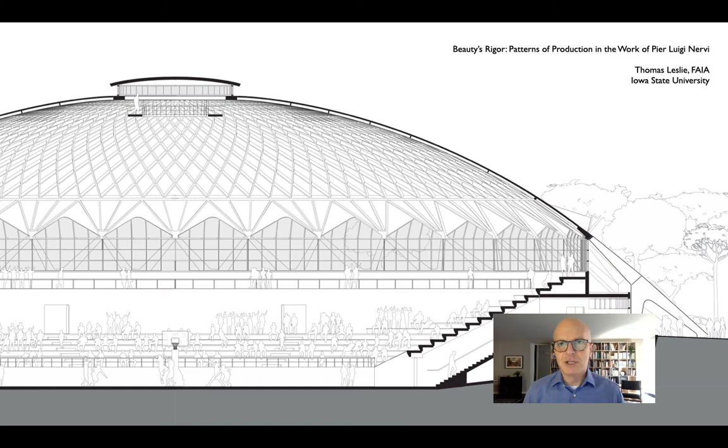So to begin with, Pier Luigi Nervi was an Italian engineer, born in 1891 in the town of Sondrio. His father was a postmaster, which was an upper middle class job at the time. And so Nervi moved around quite a bit, but ended up going to school in a Piarist school. Piarism is a particular sect of Catholicism that believes both in a very rigorous approach to learning, but also in a very particular type of social justice. So Nervi went to school not only with kids of his own stature, but from all across the socioeconomic spectrum in Italy.

And he blossomed into someone who I think is generally acknowledged as one of the great engineers, one of the great designers of the 20th century, and how he got there and how he came to do these building structures that are both incredibly impressive, long spans, some of the largest reinforced concrete domes ever built at the time, still some of the largest reinforced concrete domes in existence today, combined with this incredibly delicate, graceful sensibility, how those large spans are rendered in these very finely scaled patterns and rhythms, structural rhythms, and as I'll show, constructional rhythms. This, I think, is what made Nervi unique, that his spans aren't just the biggest spans in the world, they're also some of the most beautiful.

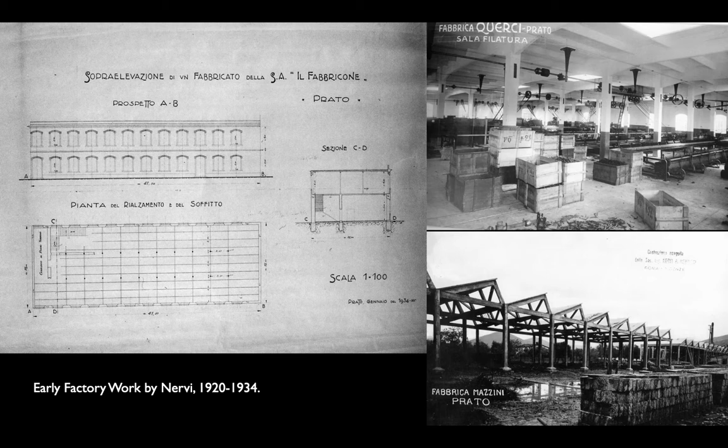So instead, Italy had to either make do with what it had, which was not very much, or find another material. Now, for Mussolini, that was brick and stone, like the old Roman architecture. Nervi, though, disagreed with this.

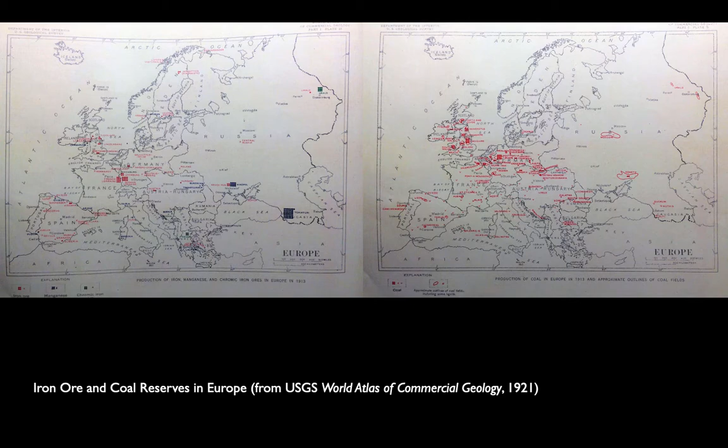And he actually wrote a very brave editorial in 1938 called For Autarky, for this economic autonomy, in which he said that, look, if you build the way the ancient Romans did, you are going to build buildings that are so heavy, that require so much brick, so much stone, that by the time you're done, you could have done the job much cheaper if you had used concrete, if you had taken just what little steel Italy can afford to make, used it as reinforcement, and built out of this new modern material that we have all the ingredients for. It's not a traditional Italian material, not a traditional Roman material, but it's actually much cheaper and therefore much more self-sufficient to build in this new modern material, right, concrete.

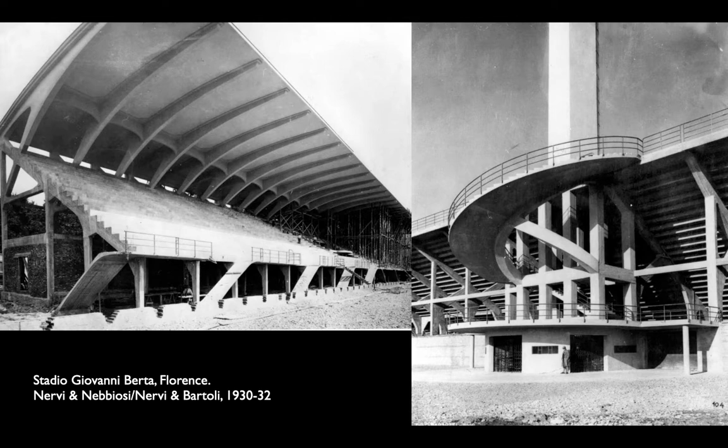Now, Nervi opens up his first contracting practice with a cousin of his, Nebbiosi, and they get the commission for the municipal stadium for Florence for a new combined football team that today is called Fiorentina. And this was a kind of fascist idea. Florence had 3 or 4 not so good football teams, and the owner of one of them realized that if they could combine their forces, like good fascists, they could have a much stronger football team. And he hires Nervi and Nebbiosi to design and build this grandstand for the new team.

You see what they built in 1930 on the left. This has this very famous cantilevered grandstand roof. And on the right, you see the second phase of the project, done in 1931-1932. Nervi takes up with a new contracting partner, Bartoli, in 1931. And Bartoli is a little bit more adventurous. Nervi, being a slightly restless engineer, is pleased with the graceful form of the cantilever, but he also wants to explore new forms that are peculiar to concrete.

And on the right, you see probably the best known element of this stadium in Florence, these helical stairs. And if you think about it, they allow the stands to fill much more efficiently. On the left, you can see that the fans are all coming in at the front, and of course everyone is just going to take the front row, and people are going to have to filter through that to get back. Nervi here is solving a circulation problem. People are coming in at the back, they can drop down to the front and fill the stadium from the bottom up. And to do that, he designs this double helix of a stair, too complex to actually calculate how that stair is going to stand up.

Now, these commissions come about because the Italian military, just like the construction industry, is facing this tremendous steel shortage. Steel is an even more important material for weaponry and for transportation, and they, having no access to it, are first of all concerned about building hangars for the Italian Air Force, which are mostly these very fragile biplanes at this point. Without steel, there's no good way to build these long spans to shelter their planes, to keep them out of the rain and the wind.

Nervi comes up with a kind of structural hack where he takes 3 or 4 different ideas and knits them together. In this first round of hangars in 1937 outside of Orvieto, there were a pair of these, and you can see that they are a kind of arched vault, so a relatively efficient shape to begin with. That vault is arched high enough that most of the roof is going to be in compression no matter what. And then he takes that vault and he turns it into what's called a lamella structure. So these diamond-shaped patterns on the underside, these intersecting ribs.

And you can think about these ribs in a couple of ways. Either they are stiffening that thin shell vault above, or the way I sort of think of it is they're like the coffering in the Pantheon.

They're kind of tricking the roof into thinking that it's 3 or 4 feet deep, when in fact you're able to scoop out most of the dead weight of the roof and leave this network of ribs in place that are going to channel most of the loads. So a couple of clever structural ideas there.

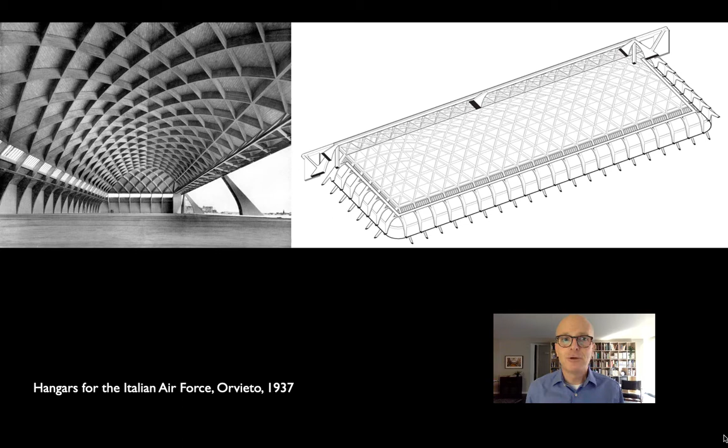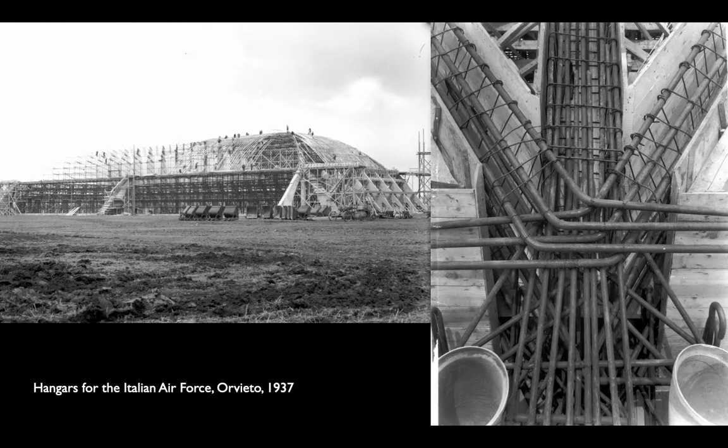It's a very clever scheme, right? Combining a couple of structural ideas into one unified form, and it has this very pleasing pattern to it, right? The structure breaks down in a way that we recognize as slightly more humanly scaled. Now, the hangars are a huge success. They come in on budget. They do a good job of protecting the planes.

But Nervi is a little bit uneasy about how they actually are built and how they perform. And the reason is twofold. One is, as you can see on the right, even though he's managed to scoop out most of the dead weight from this vault, the roof is heavy enough that as it comes down to these buttresses, as all of those loads collect, this is using an awful lot of that very precious and very hard to come by steel.

It's using it for reinforcing, which is a little bit easier to manufacture than large steel structural elements. But as you can see, when this gets down to the base, it's pretty much a steel structure with a thin coating of concrete on it. The other thing that Nervi is troubled by is the fact that because it's poured in place, it has to be monolithic. It has to be poured all at once.

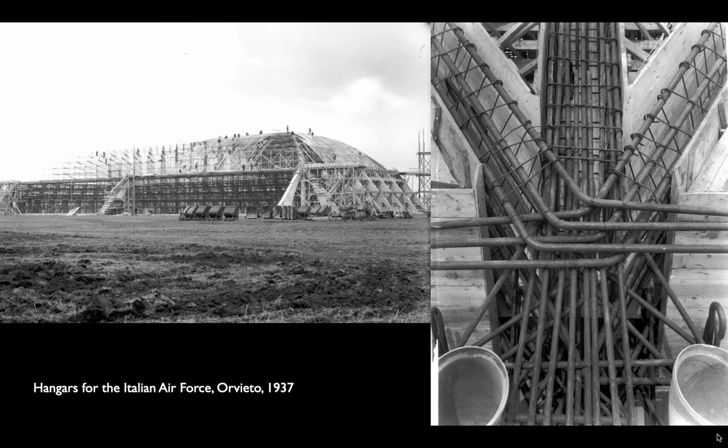And Nervi essentially has to form the entire structure out of wood before he can pour it in concrete. He refers to this as building the building twice, wasting all of that expensive timber formwork. Italy has lots of timber, but it doesn't have an enormous amount. It's been a heavily deforested peninsula since Roman times, and timber is available but not free. And Nervi realizes that there are a couple of ways that these structures could probably be improved.

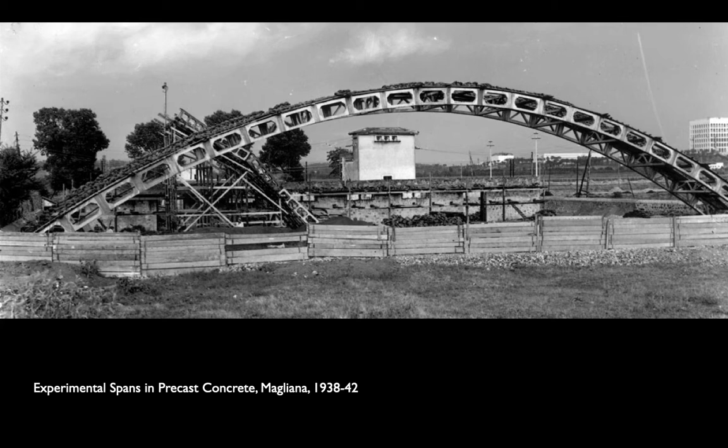He goes back to his yard in Magliana and he starts looking at ways to eliminate dead weight in the roof, and also to eliminate the timber formwork that's excessively costly. And he begins these experiments in precasting, where he's basically fabricating elements on the ground out of concrete. And because he's prefabricating them, he can use much more complicated formwork, right? He's not building formwork up in the sky. He can cast these on the ground.

So as you can see, this segment here has one arch that's all trussed up. You see that in the background. And another that's more like a Vierendeel, right? Thick moment connections at the edge of each arch. You can also see in the background another experiment, in which he realized that you could cast larger truss elements that would take the place of those ribs, cast them on the ground, lift them into place, and in this sketch in Nervi's archives, you can see in the upper left,

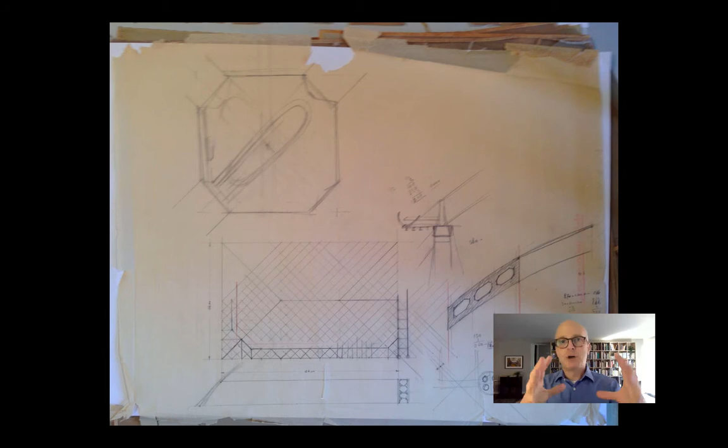linking them together, gluing them together basically by taking a wire reinforcement, not thick rebar, but thinner wire, looping them around and pouring this octagon shape of a poured-in-place concrete plug. So precasting the 4 elements coming into it on the diagonal, building a small octagonal box that these all frame into, pouring the concrete to glue the reinforcing together, and basically creating a monolithic, very efficient concrete structure out of hundreds and hundreds of little pieces.

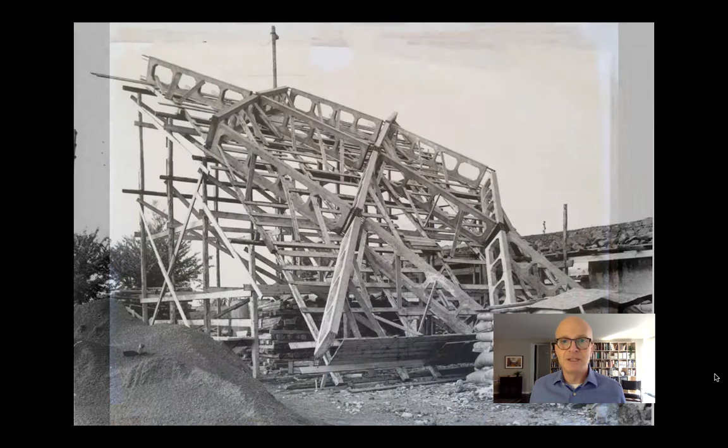And this is what that looks like. This is a close-up of that experimental rig. And you can see that instead of formwork, all he has to build to support this is scaffolding. You can use scantling timber for that. And you can see between these truss elements the reinforcing wire sticking out, ready to receive the octagonal plugs that will hold it all together. And this principle becomes something that sticks with Nervi his whole career.

He realizes that prefabrication means that he can break the scale of the construction job down to small enough elements that, first of all, a small crew of workmen can put them together on the ground. And second of all, a relatively small piece of equipment can lift those pieces into place.

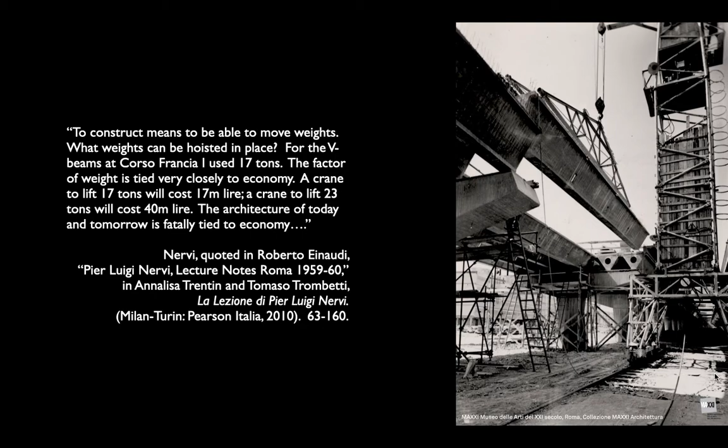Nervi Bartoli is essentially an artisanal contracting firm. They don't own their own heavy equipment, they have to rent it. And therefore, if they can rent a smaller piece of equipment to lift smaller elements of construction, they can save money, right? And as you can see here, they can save, in some cases, more than 50% of the rental costs.

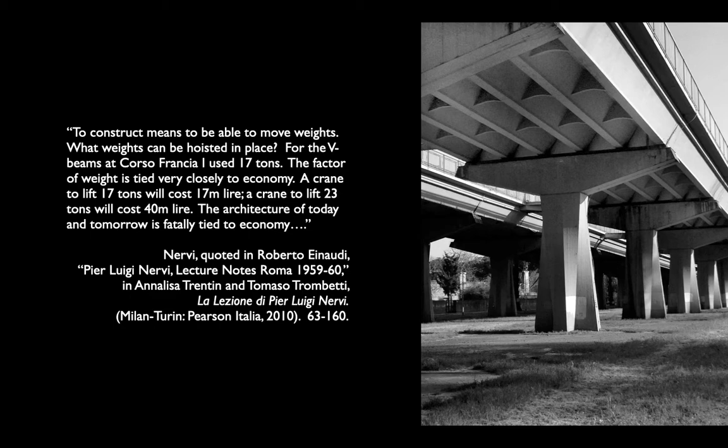And here you can see that this sticks with him. This is the prefabricated, precast Corso Francia, which is the viaduct that runs behind the Palazzetto and the Rome Olympic sites up north of town.

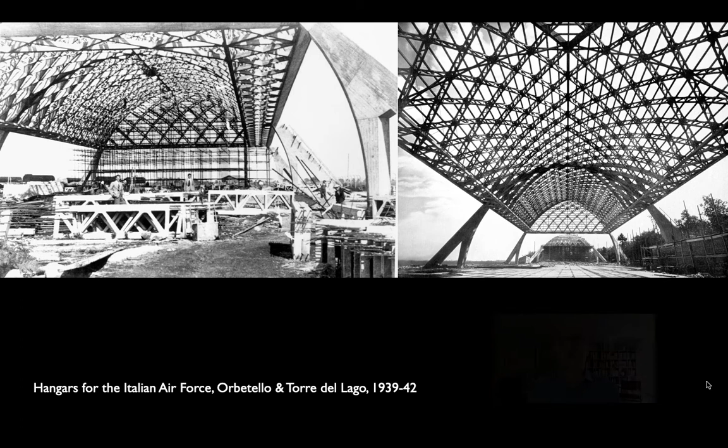And I think that what this represents is Nervi realizing that the engineering and the construction and the fabrication have all gotten so honed, so distilled, so boiled down to their bare essence, that it's almost inevitable that what comes out of that is something beautiful, right? And I think of this as him almost backing into architecture from engineering, right? Creating engineering that's so rigorous, so clearly conceived that it actually reads as something visually quite beautiful. The span combined with the human scale pattern gives us something that goes beyond simple engineering.

Very few perspectives, a lot of plans to show where things lay out, but most of it is about the performance and about the process, about the way the statics are going to work and the way the project is going to break down into these human scale elements, where a handful of workers can move them around the site, can raise them into place, and in doing so save the dead weight of those earlier shell roofs.

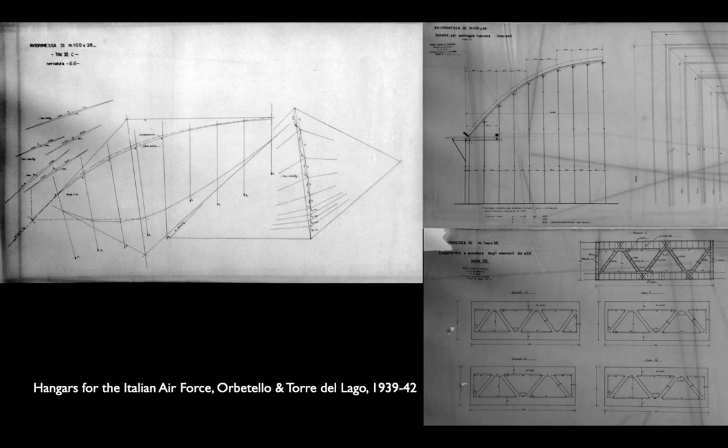Now, there's one more military experiment that Nervi's commissioned to do in the 1940s, in the midst of the war. The Italian Navy, as you can appreciate, was quite desperate, right? Because without steel, they can't build the destroyers and battleships that they need. And so they go to Nervi and say, we wonder if there's any possibility that you could build ships out of concrete.

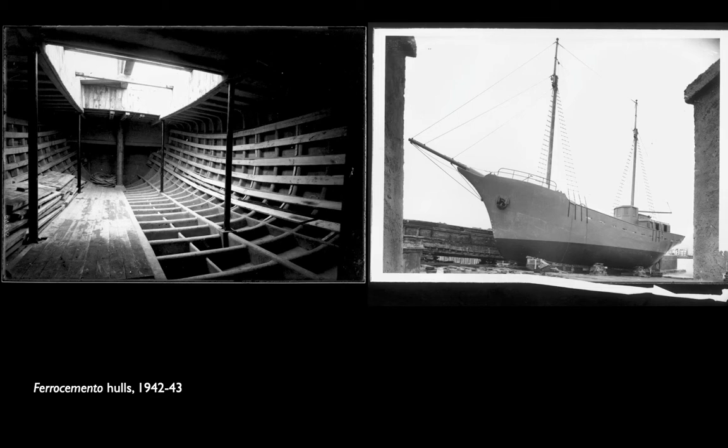And Nervi revives a French technique called ferro cement that takes essentially metal mesh screens, almost like window screens but slightly coarser grain, bends those screens into the forms of ship hulls, and then literally just trowels lightweight, aggregate-free concrete into those. And when that concrete cures around the screens, what you get is a material that's kind of a hybrid, right? Somewhere between steel in terms of its ductility and concrete in terms of its toughness. And Nervi builds 4 of these.

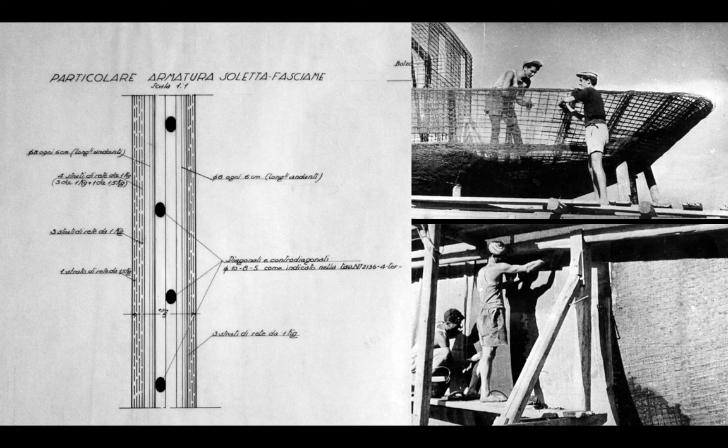But Nervi realizes that he has something here that can hack his prefabrication strategies even further. And again, later he says, look, prefabrication is one thing, but you're still building with solid pieces of reinforced concrete. And if you can take this technique, ferrocemento, and apply prefabrication to it, you can create elements that instead of being, say, 3 inches thick, right, an inch for the rebar and then 1 inch of cover on all sides, you can actually reduce that in half, to about 1.5 inches, and thus take out half the weight of any prefabricated element. So weight is his constant concern, not necessarily just in the finished product, but in the lifting of individual pieces.

So Nervi, by the end of the war, has this library of structural techniques and considerable success not only in structural engineering, but also in prefabrication, and especially in this hacked prefabrication that allows him to build these very lightweight roof sections. So after the war, in 1947, he gets this kind of insane commission for a new exposition hall for the city of Turin. Turin has always been Italy's Detroit, the center of the automotive industry. And Fiat, the largest auto manufacturer in Italy, at the end of the war convinces the city to host the International Automobile Exposition in 1949.

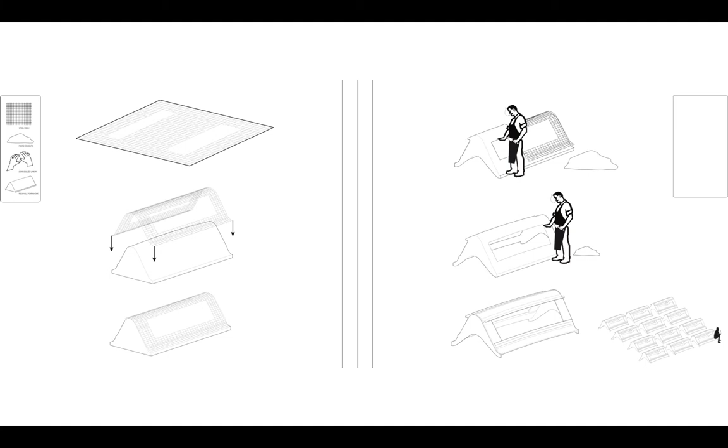While one crew is pouring all the foundations and getting all of the substructure ready, Nervi is going to have a brigade of these unskilled laborers who are constantly following this almost algorithmic process of taking metal mesh, bending it over a clay mold, taking the resulting shape, troweling lightweight concrete onto it, and just letting it cure, and doing this over and over again while the excavations are going on site, essentially telescoping the construction process.

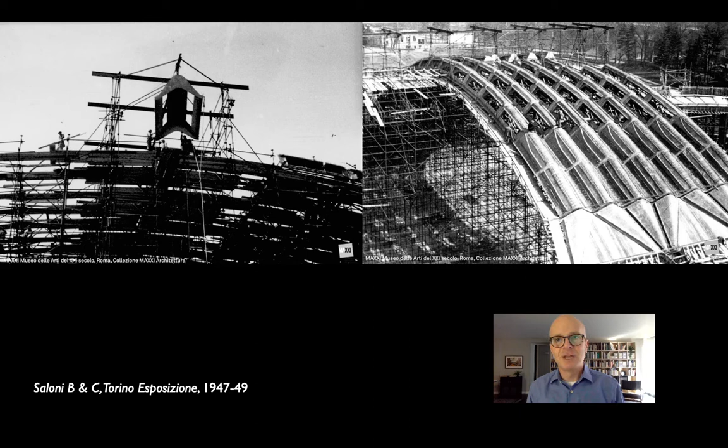When one whole arch of these is in place, they pour a rib at the bottom and top of each one, and they've hacked together a double hinged arch, a folded plate, ferro cement, and a prefabrication. And as you can see, also Nervi carves out windows in these elements to reduce dead weight around what will be the neutral axis in a 2-hinged arch. So there's about 6 or 7 things going on here all at once.

Nervi builds the thing on time, on budget, and when it opens up, just like with the hangars, it's hailed not just as a work of engineering, but as a work of architecture. And I think the reason for this is that the human scale of the construction is imprinted on this incredibly vast span. And it reads not as a work of cold technological engineering, but one that actually has some human scale to it.

The auto show is a big success, and Nervi is hailed not only for this part, but also for this apse that you see on the right of the image. One of the provisions of the competition was that they wanted this kind of ceremonial space where they could give out the top prizes. And as you see on the right, that is a half dome. And a half dome, it turns out, is a terrible shape structurally, right? Because the corners of it just want to flatten out.

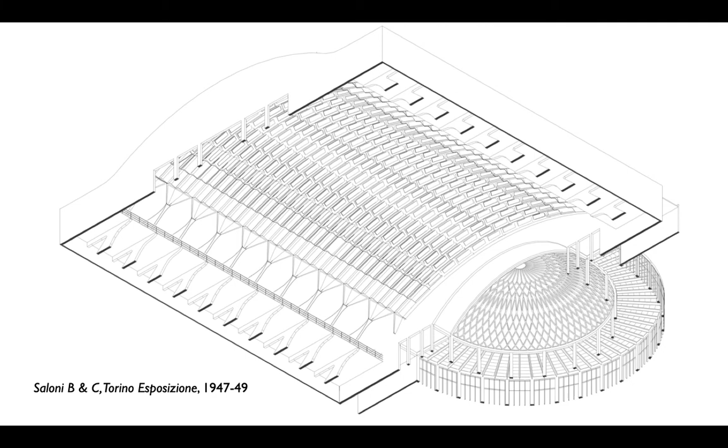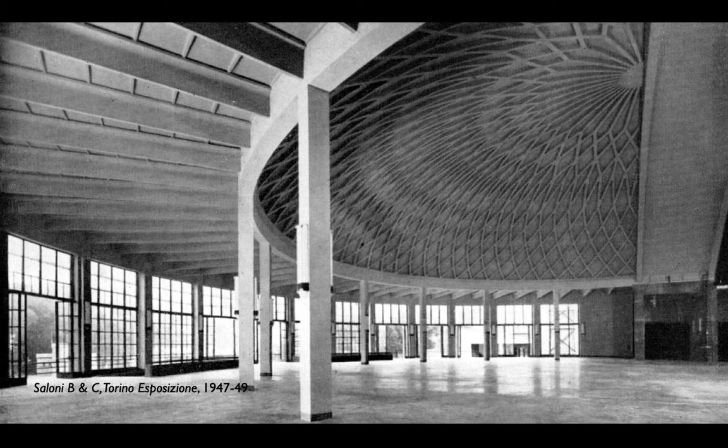And what's going to happen is they're going to pour concrete onto the tops of the pans. Each one of the little brims down at the bottom is going to join with its neighbor to form a void that will make one of those ribs on the bottom. And the result is that you get this coffered ceiling. Again, very much like the Pantheon in Rome, where you have essentially a very, very thick dome, but without most of the dead weight, right? You're tricking this thin shell dome into thinking that it's much thicker.

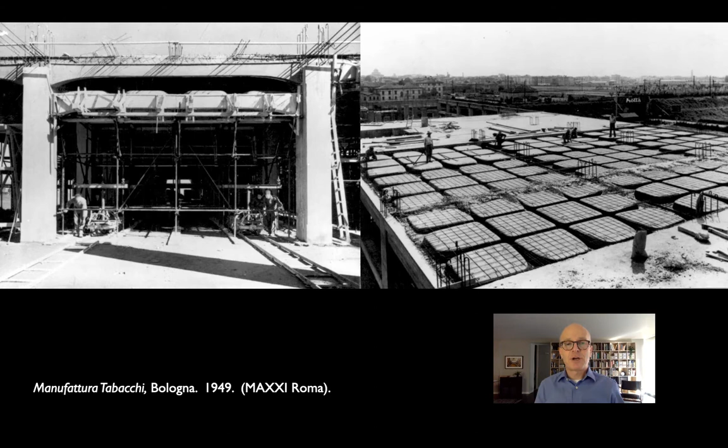And those ribs all carry the weight of the dome. That all flows down onto this ring beam that you see around the edge. Again, a very pragmatic approach, but one that clearly has an architectural effect at the end of the day. Now, Nervi uses this process, right? Uses ferrocement not only to build roof forms, but also to build formwork.

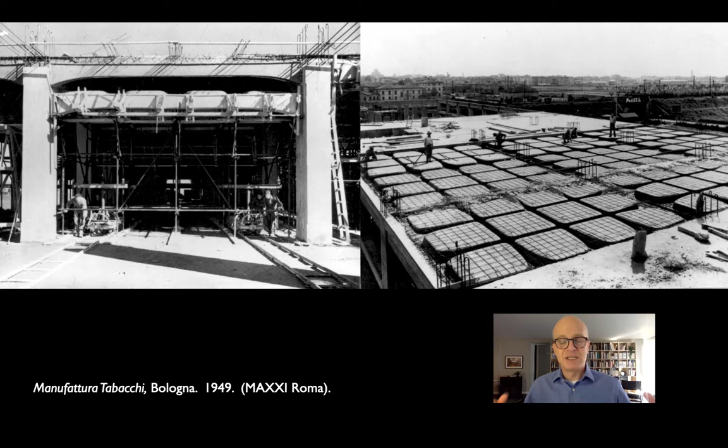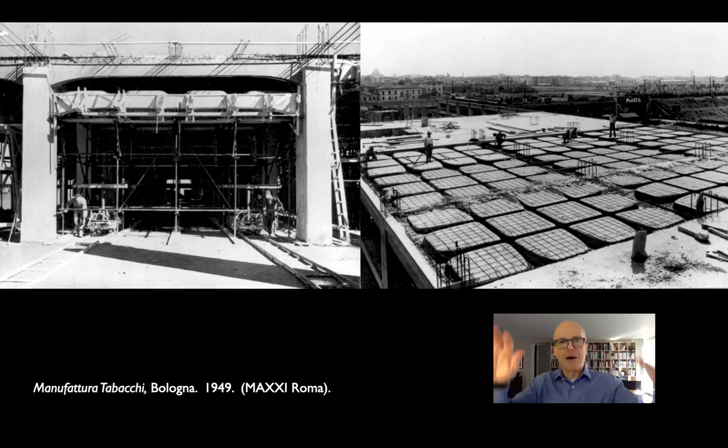And maybe most famously, the Manifattura Tabacchi in Bologna, where he builds these formwork machines that, like an assembly line, go down the long floors of the warehouse, stamping out concrete slabs above them. You see a handful of these machines on the right. Here's what we imagine they would have looked like in place. They can drop them down, move them along to the next bay.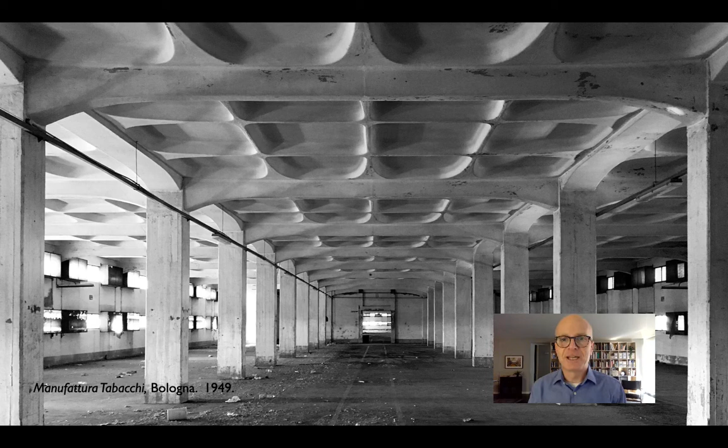And even though no one was ever supposed to see the interior, right? This is just a warehouse. He's thoughtful enough to taper the pans in ways that respond to the way that the shear forces collect along those joists, and create something, again, that's unintentionally fairly beautiful, right?

A building that unfortunately has seen a lack of maintenance over the last 20 or 30 years, so it's not in great shape. But you can see that there is an architectural effect with the detail at the edges of the pans and the repetitive structure marching down assembly line-like that breaks the scale of this massive building down into something a little bit more human.

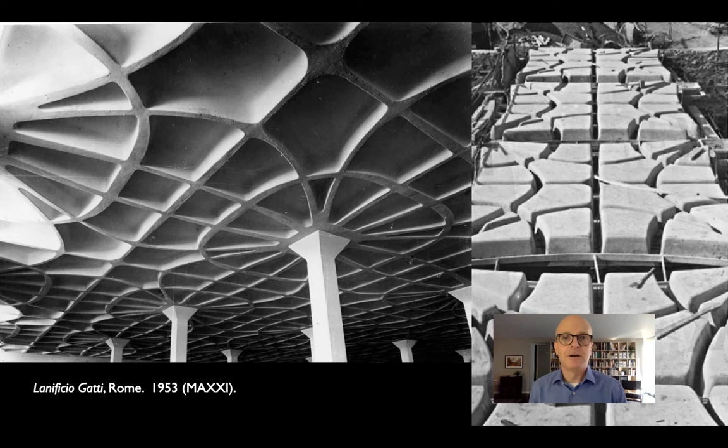And maybe even more famously, he uses this technique on this wool mill outside of Rome on the Viale Prenestina. It's now a Decathlon sporting goods store if you want to go see it. On the right, you can see these ferrocement pans now shaped to reflect the collection of isostatic stresses within the slab and funneling those into the columns.

This is the beauty of ferrocement, is that because it's such a molded process, because it uses jigs to make things over and over again, there's no limit to what sort of shapes you can make with them. And this is the technique that Nervi perfects with the Palazzetto dello Sport.

He uses these ferrocement pans, again, fabricated in sequence while the foundations are being dug for the dome. You can see here a crew of 5 guys trucking one of these pans over to the site. A crane pops out of the center of the dome that you see on the right. Nervi rented it for exactly 30 days, and they were able to assemble something like 1,600 of these pans around the surface of the dome.

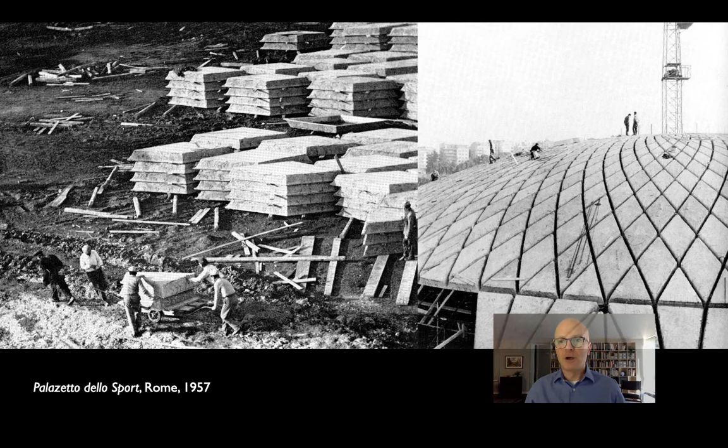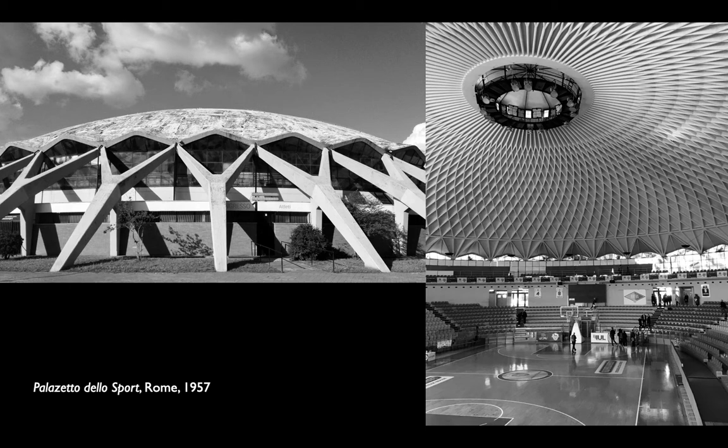You can see there's kind of rebar laying around. They're going to put those in the channels that are formed between the pans. Those will create the very characteristic ribs that you see on the underside of the dome. The whole dome is kind of picked up by these poured in place buttresses that go around the outside. So you have this paradoxical effect of the dome actually resting on top of this band of glass around the edge. And it's called inevitably by American critics, especially, a concrete pantheon.

And Nervi's response is, first of all, the Pantheon itself is made of concrete. So that's a little ridiculous. But secondly, he's done it one better, right? Not only is the dome here, he claims, eggshell thin. Okay, if you discount the ribs, it's eggshell thin, proportionally anyway, just a couple of inches.

But he says, look, in the Roman Pantheon, the light comes through the oculus at the top. Here, in the 20th century Pantheon, we can actually make the roof so lightweight that the light comes in from underneath. And this gives the roof this kind of lightweight quality. It gets compared to a spider web or a sunflower, all of these kind of organic metaphors, but all of them talking about just how light Nervi is able to make a concrete seem.

The real beauty of this from a construction point of view is that Nervi built a dome first, and then they came in and excavated the bowl of the arena so that they could pour all of the seating and do all of the work inside, even in inclement weather. Right? So the dome is actually not only a dome for the finished product, but it's also the kind of protector for most of the construction that goes on.

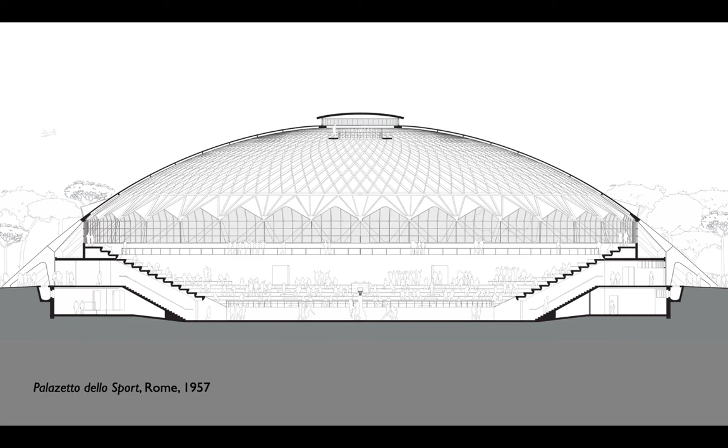This gets built as a demonstration project. Italy has to prove to the International Olympic Committee that they are in fact capable of building Olympic arenas. This is the one that sort of gets them the games. Nervi gets a handful of commissions for the actual event, including the Stadio Flaminio, the Corso Francia, and the reinforced concrete dome that beats the Palazzetto for record span, the Palazzo dello Sport, the large Palace of Sport.

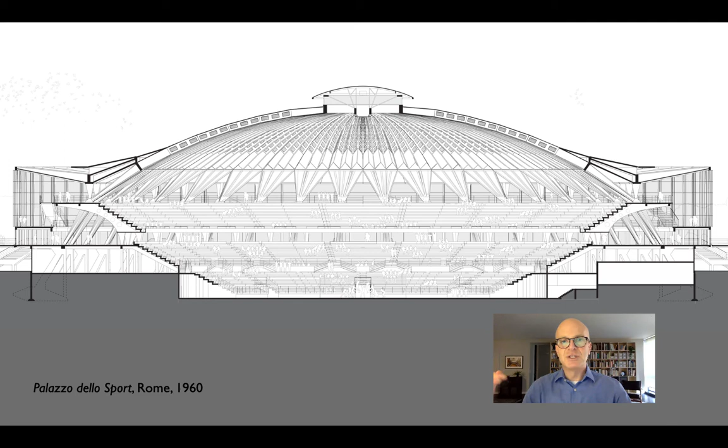And this to me is fascinating because it takes the same kind of ferrocement folded plate of the Turin exhibition hall, and instead of extruding it, it wraps it around a rotational grid. So you can see the deep folds of the dome. Those are all, again, ferrocement boat hulls, or wave ashlars is what Nervi calls them. They're sitting on these precast fans that then go into the ring of the upper seating, and that's the thing that restrains them, that prevents the dome from kind of spreading out.

Underneath that seating tier, Nervi sort of can't help himself. He's throwing every trick that he has in there, and so you get these ferrocement pans that form the underside of the seating, right? Nervi, I think, here is kind of showing off a little bit. This building, even though it's much bigger, has never quite gotten the love that the Palazzetto has gotten. It's a little bit less of a clear structural solution, but nevertheless, it became iconic.

The 1960 Games were the first Olympics to be televised worldwide via satellite. And so when America tuned in to see Cassius Clay win the gold medal in boxing, later to become Muhammad Ali, of course, they saw him do it under Nervi's dome. And the buildings themselves really became icons. They show up in all sorts of weird places.

They become symbols for Italy's kind of resurgence, the so-called Italian miracle. The 1960 Olympics are the kind of highlight of this, right? A country that was basically devastated by World War II, 15 years later, has come back and is producing buildings that are as high-tech and advanced engineering as you can imagine.

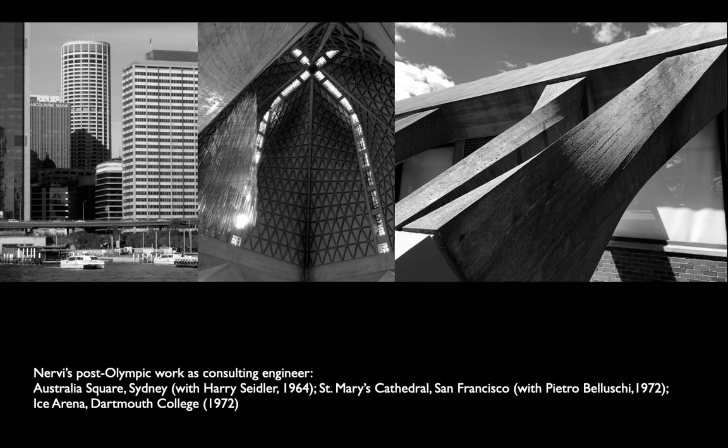And the Olympics really turn Nervi from a kind of regional engineer who's able to take advantage of the kind of particular material economy and labor economy of Italy, and it turns him into a celebrity engineer, someone who becomes a consultant on jobs ranging from Australia Square in Sydney, with Harry Seidler on the left, to the Americas.

So here in the middle, St. Mary's Cathedral in San Francisco, which he does with Pietro Belluschi, finished in 1972, and the hockey arena, one of two sports buildings that Nervi does at Dartmouth College in 1972. The second one; the first one, an indoor track, is done in the 1960s.

So Nervi also is thought of often as a kind of engineer philosopher, and after the Rome Olympics, he's asked by Harvard to give the Charles Eliot Norton lectures in poetry, which is an odd thing for a structural engineer, to be sure, but Nervi delivers this series of lectures that is later republished as the book Aesthetics and Technology in Building.

And he really lays out a philosophy that I think rings really true and reflects very well the process that those of us who have worked in firms or done projects where engineering has played a really important role, not just in the performance of the building, but also in aesthetics. This is the way that it does seem to work.